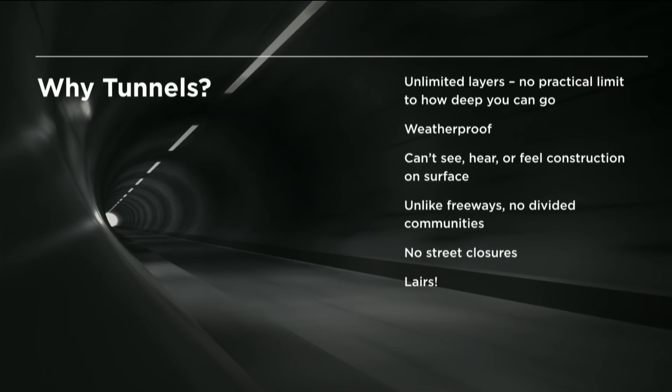The other thing is you can't see, hear, or feel the construction. When you ride the tunnel, you'll see the entrance basically in the backyard of a house. The neighbor of that house, when the boring machine broke through the other side, was watching TV, and didn't even stop watching TV. That's how subtle it was. So you will not hear, see, or feel the tunnels being created.

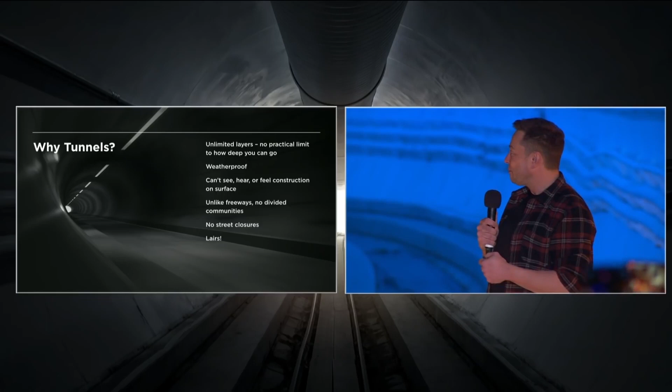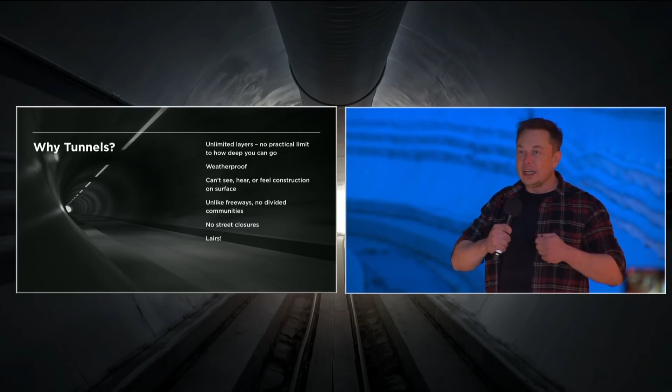Unlike freeways or any surface transit, it will not divide communities. You don't have to railroad through communities. You can weave the boring system's tunnel network into the fabric of a city without changing its character - the city will still feel the same. You're not going to get in anyone's way or obstruct anyone's view. You'll have this revolutionary transport system, and your city will still feel like your city.

And layers, of course - forgot to mention layers, plural.

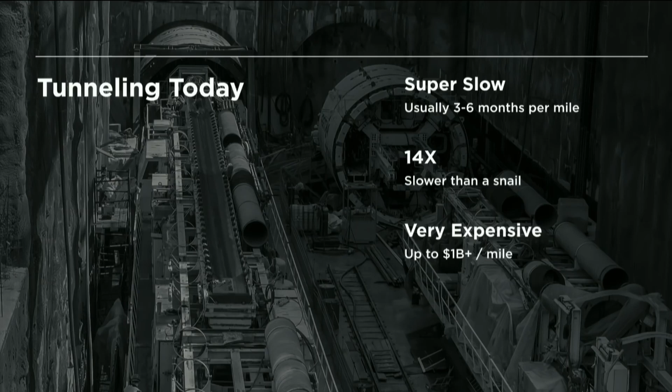So what's the problem with tunnels? They usually take a very long time to build and are very expensive. Typically a tunnel will take 3 to 6 months per mile, in some cases a year per mile, and can cost up to $1 billion per mile. In fact, the LA subway extension that just got completed cost $2 billion for 2.5 miles. There was a subway extension in New York that cost $2 billion for a mile.

So clearly something needs to be done to revolutionize tunneling technology. We need to build tunnels way faster and for a hell of a lot less money. In fact, the fastest tunneling machine in the world right now is 14 times slower than a snail. So when I say we're going to have a tunneling machine that can do a mile a week, we're not talking about the sandworms of Dune here - it's still slow, just as fast as a snail. You'll be able to escape it.

All right, this is our snail. This is Gary the Sixth. Yeah, it turns out snails don't live that long, so this is Gary the Sixth.

But this is our goal: we must be faster than a snail. So what are we doing to increase the speed of tunneling?

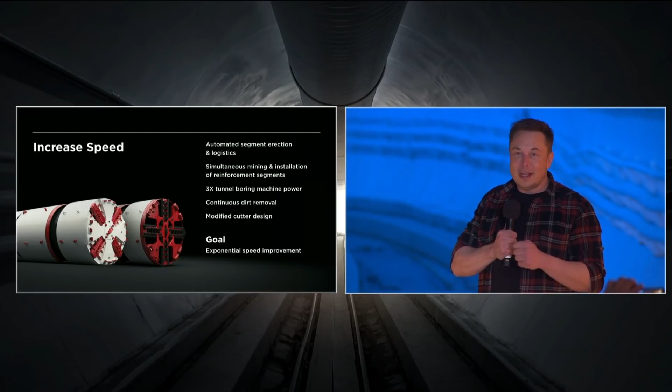A lot of these things, when you boil it down, aren't impossible, it's just difficult engineering. There's no Nobel Prize required here. It's work, but it's very solvable.

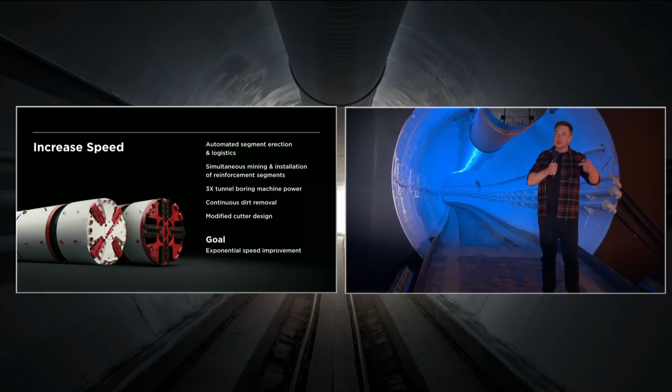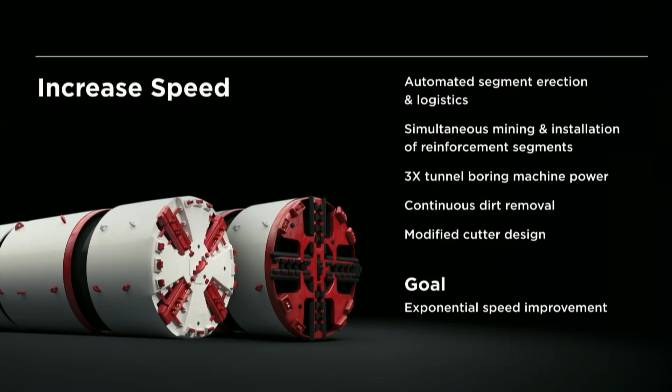The other thing that needs to happen is simultaneous drilling and tunnel reinforcing. Right now, old tunneling machines drill, stop, do a bunch of reinforcements, then drill, stop, do reinforcements again. So the combination of automated segment placement and being able to drill while reinforcing is about a 5-fold increase in speed.

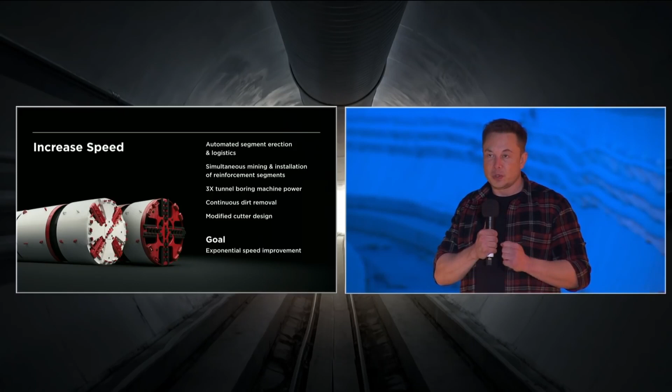With our design, we've also tripled the power of the drill, so it can drill 3 times faster. That results in a theoretical net speed increase of about 15 compared to the next best tunneling machine. So hopefully we'll beat our snail. Aspirationally, we should be slightly faster than a snail after doing those things.

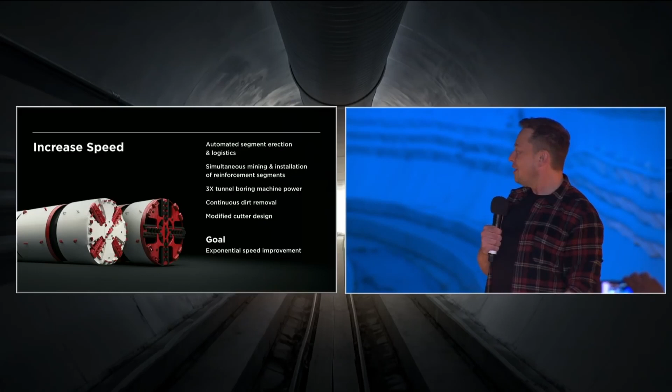And there's some other things. We've modified the cutter design. The dirt removal is continuous. There are 2 lanes instead of 1. We're very confident the engineering closes for achieving a 15x improvement, and we're actually building the machine that can do that right now.

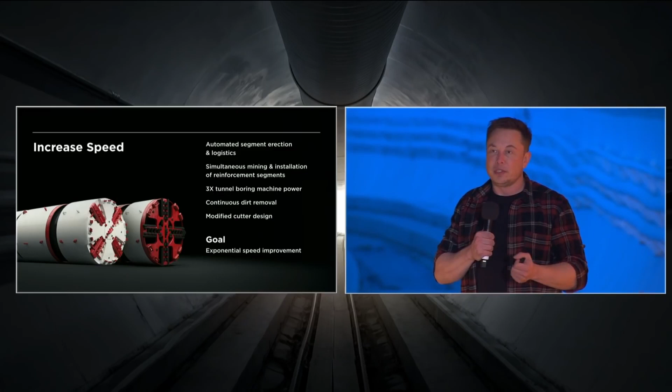A few other things decrease the cost of on-site integration, meaning building the tunnel reinforcing segments on-site instead of having them built far away and trucked in, using the dirt we dig out of the tunnel to form the concrete for the reinforcing segments. So the steel reinforced concrete segments are 70% just dirt.

But amazingly, in other tunneling situations, they actually truck the dirt from the tunnel out and truck new dirt in, which makes no sense. So we just use the dirt from the tunnel, add some cement and steel, and create these reinforcing segments on site. A lot of these things are really quite elementary, but are not done.

Then we're having a narrower tunnel diameter, not a gigantic tunnel, but just one that's right for vehicles, which is also important.

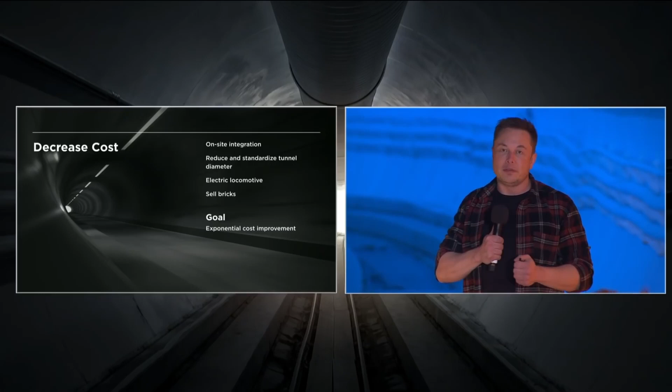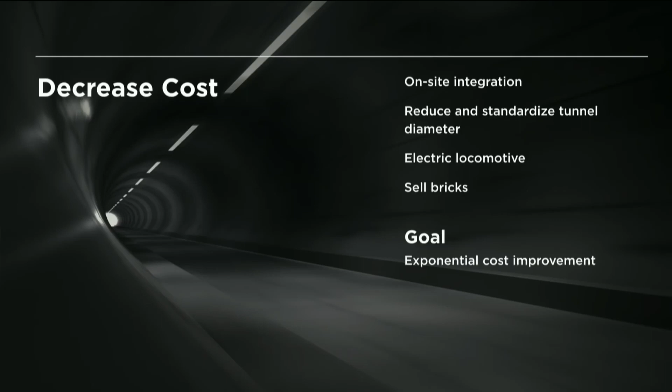We developed an electric locomotive, of course. It seems obvious, but other tunneling efforts use diesel locomotives, which is problematic in a tunnel because it absorbs all the oxygen and emits noxious gas. This is an obvious thing to make electric.

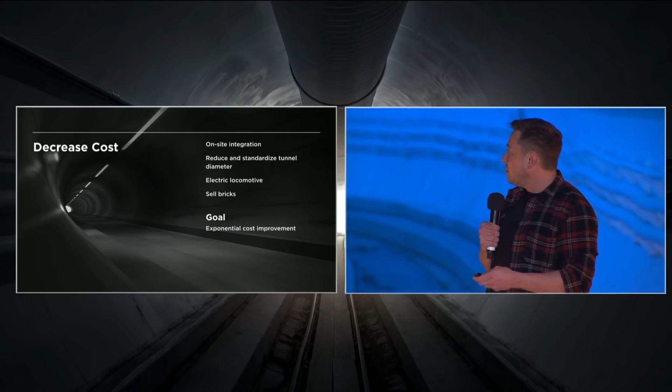And then selling bricks, I'll get more into that. About 15% of tunneling cost is just trucking the dirt out.

So we thought, well, what can we do on site that would alleviate that dirt cost? So we're just making bricks out of the dirt from the tunnel and then selling the bricks. We should be able to completely get rid of the dirt removal cost. Actually, depending on how many bricks we sell, the tunnel could pay for itself with just bricks.

So we'll be selling bricks at 10 cents a brick, which is less than Home Depot, which I'm told is 25 cents a brick. So get your discount bricks here. It's going to be great.

And then if anyone shows up and needs bricks for affordable housing, it's free.

We're going to do all sorts of brick kits with bricks that fit into each other, like giant-sized Lego kits. You'll be able to build all sorts of things with bricks.

So we drilled this tunnel with our first generation machine, Godot. We'll start drilling soon with our second generation machine, Linestorm, which is about a 3-fold improvement over the current state of the art. Then Prufrock will be our third generation. We'll start building that up early next year, the parts are starting to arrive, and that'll be a 15-fold improvement over the state of the art.

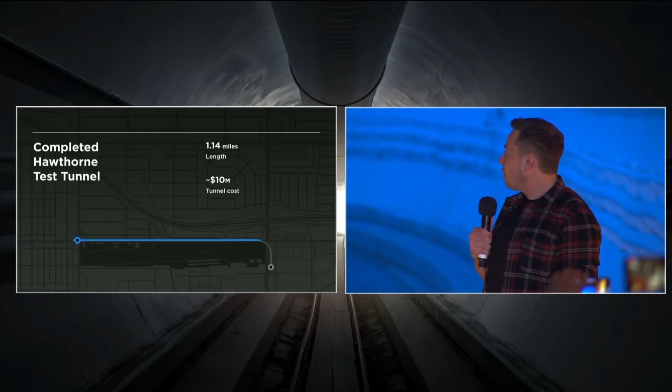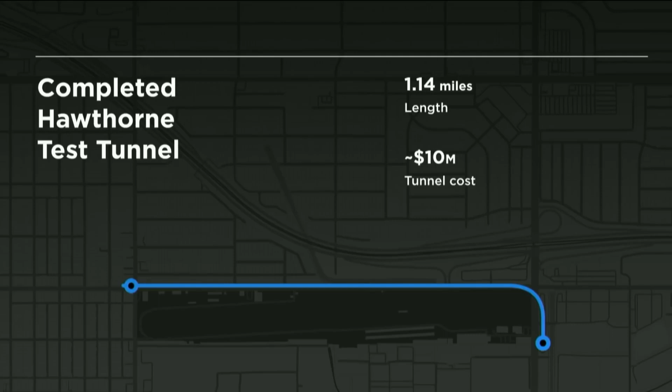Normally, tunnels cost up to $1 billion. A discount tunnel would be around $200 million. But we're able to build this tunnel for about $10 million.

I think this is a very important proof of concept for the technology. Building a tunnel in LA is like the tunnel equivalent of Broadway. We've got earthquakes, oil and gas and methane in the soil — they still drill oil in LA — and sandy, rocky soil. There are about a million regulatory agencies you have to satisfy. Essentially, if you can tunnel here, you can tunnel anywhere.

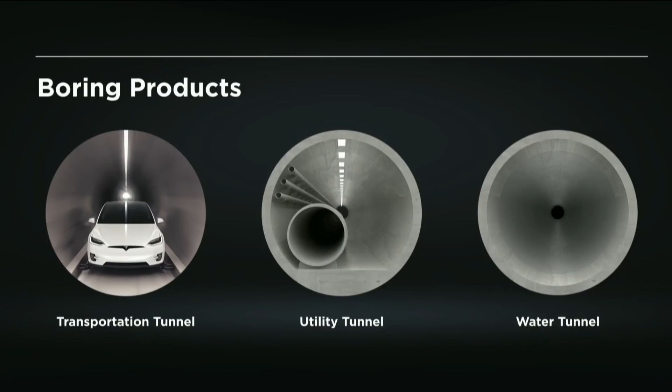We have three tunnel products. One is the loop, for transportation pods, which you'll try out later today — that's a transport tunnel. We're also seeing a lot of interest in utility tunnels, where a municipality can get a big tunnel and put water mains and electricity lines inside. So if there's a water main break, instead of flooding the main street, they can go into the Boring Company tunnel and fix it. It saves cities a lot of grief. And then there's transport of water, sewage, and stuff like that. We just dig holes in the ground.

This fundamentally is what we're trying to solve. We've all been there many, many times — we must solve the soul-destroying traffic situation.

The loop consists of autonomous electric vehicles combined with deployable guide wheels, so the car braces itself against the side of the tunnel to stay safe, even if it loses power, someone goes crazy, or there's a mechanical failure. Those guide wheels keep the car centered in the tunnel and ensure you can go through very fast and still be safe.

In terms of stations, the intent is to have many more stations than a subway — at least 10 or 20 times more. This is important because you can intersperse stations throughout the city instead of dumping a ton of traffic in one location. By having many stations, people get closer to their destination, and you don't disrupt traffic patterns around where the loop exits. Depending on how much room you have, you can use an elevator, which only takes up a few parking spaces, or a spiral ramp or a long ramp. Combine that with fast, low-cost tunnels, and you've got a very exciting transport solution.

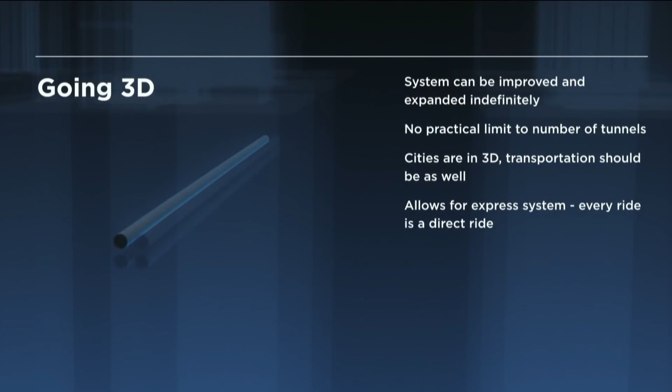The thing about going 3D is that you can just keep expanding the number of tunnels. One question we're often asked is: sure, if you build this tunnel, people will use it, it'll get full, and we'll be back where we started — like adding a lane on the freeway, where traffic expands to fill the available volume. But with 3D, you could have 16 tunnels going in the same direction — as many as you want. I'm pretty sure everyone in the United States isn't going to move to LA, but you could literally build enough tunnels to transport everyone in the US within LA. There is no limit — this is very important. The system can be improved and expanded indefinitely. It's really about making transport 3D.

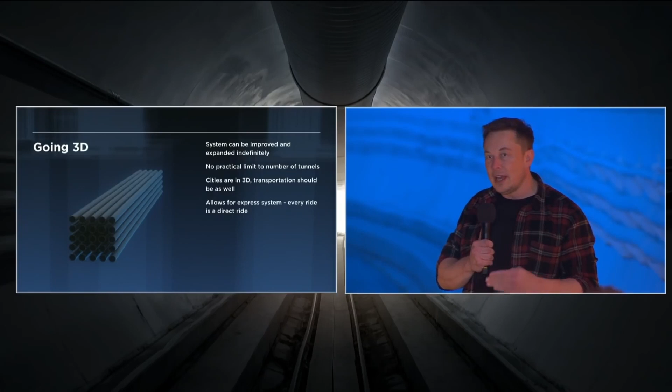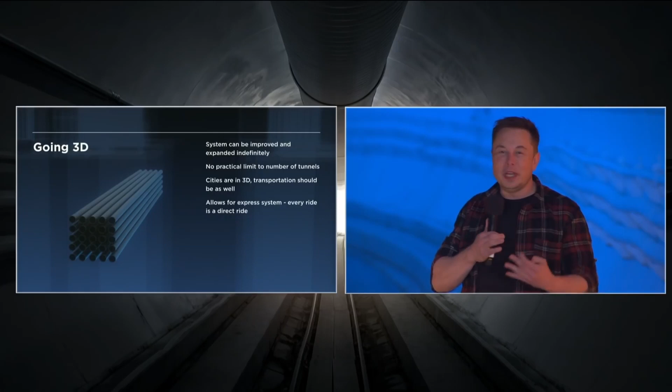The way it works is there'll be a main artery for the tunnel traveling at 150 miles an hour — kind of like an underground highway. Think of how a subway works: it's like a bunch of stop streets, you keep stopping, so the average speed including stops is about 10 miles an hour. But the loop's main arteries travel at 150 miles an hour, and only when you want to exit would you take an off-ramp. So you can travel the vast majority of your journey without stopping, at 150 miles an hour, slowing down only at your exit, then automatically transfer from one tunnel to another. It's like a 3D highway system underground, basically.

For the elevators, we construct them off-site. They're prefabricated, self-contained steel structures. So to insert the elevator, you just dig a hole in the ground real fast, bring the prefabricated elevator in sections, drop it down, connect the sections, and you're done. There's no extended construction project. This is important so you don't have construction projects disrupting the city all over the place.

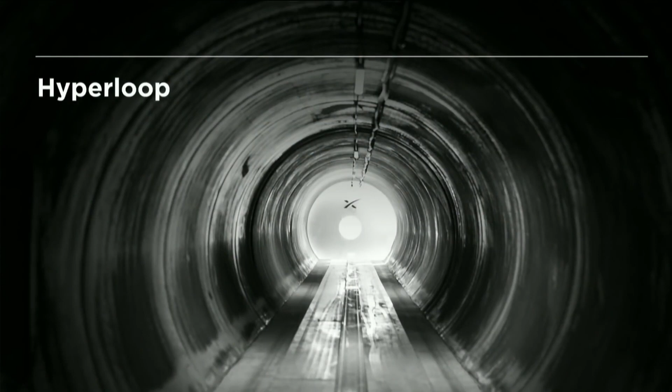And then one day it will connect to the Hyperloop. But that's for another time.

What I think this really amounts to is an actual solution to the soul-crushing burden of traffic. This is something I think will actually work. It's scalable, and we have a demonstration tunnel here, and we expect to expand this over time to many cities all around the world, and give people more time for their friends and family.